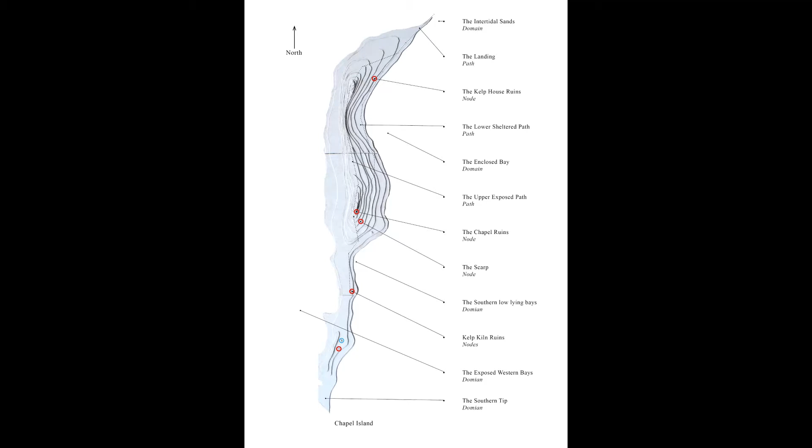I found in my early research there was ruins of a small chapel on a nearby island with a suspected link to the mainland abbey. I began to envision movement on the site again and reinstating a centuries-old connection.

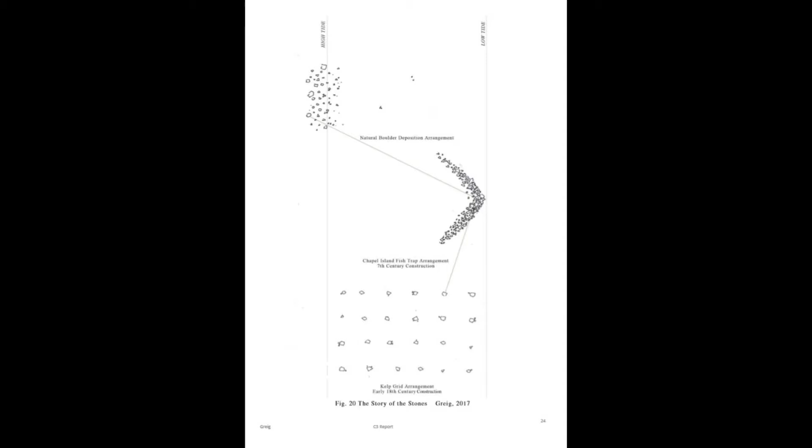The idea of movement was reinforced when I found that the stones of fish traps originally built by the monks in the 7th century were later repurposed for the infrastructure of the 18th century kelp industry on the very same foreshore. A rich historical site context was unfolding in front of me, and my research began to focus on the historic kelp industry that once had a significant commercial importance to the area.

A National Trust volunteer kindly lent me a rare historical book that documented industrious activities on the shoreline, namely the gruelling process of burning kelp in crude, circular stone kilns. The resultant soda ash was used for dyeing linen and making soap.

Early charcoal sketches attempted to capture ideas on framing views to the landscape, but also sheltering visitors from elements. I think these set the tone and the scale of the spaces at the beginning of the project that I felt were appropriate.

On my first low tide walk to the Chapel Island, about 600 metres from the mainland, the wind was relentless. I welcomed some shelter from the topography once on the island. I knew there was something interesting in how the exposure to the elements and the natural pockets of shelter could begin to define zones throughout the site.

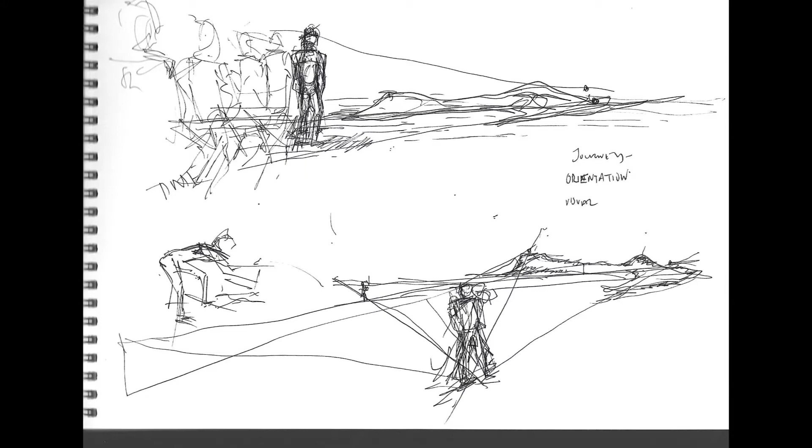All the historic infrastructure was in ruins and overgrown, but by mapping it, it provided an interesting diagram of the past movements and processes, and this helped to inform my site plan and the idea of a journey.

I put together some conceptual collages that explored the foreshore, the kelp processing heritage, and the proposed journey and engagement with the site. I felt these successfully began to unlock the site and captured some of my initial thoughts and experiences.

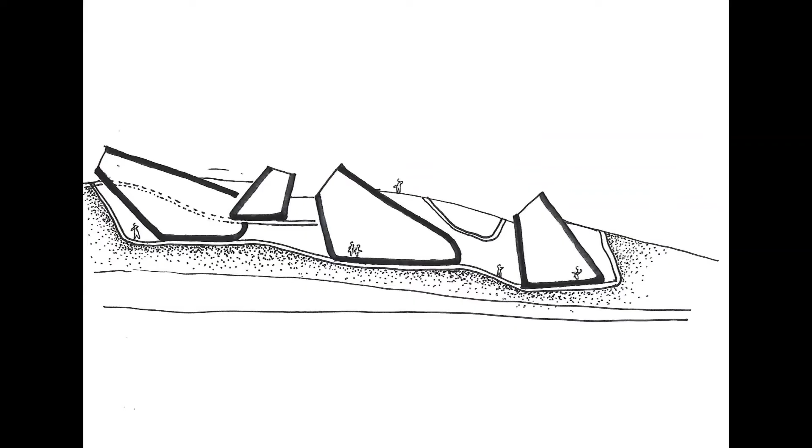Simple cardboard and clay models allowed me to experiment with initial forms and contrasting exposure and enclosure.

I was interested in developing a phenomenological approach to the concept. I tried to get as involved as possible with the site materials and the raw seaweed product. I researched emerging areas of sustainable seaweed uses, including traditional Irish baths and cosmetics.

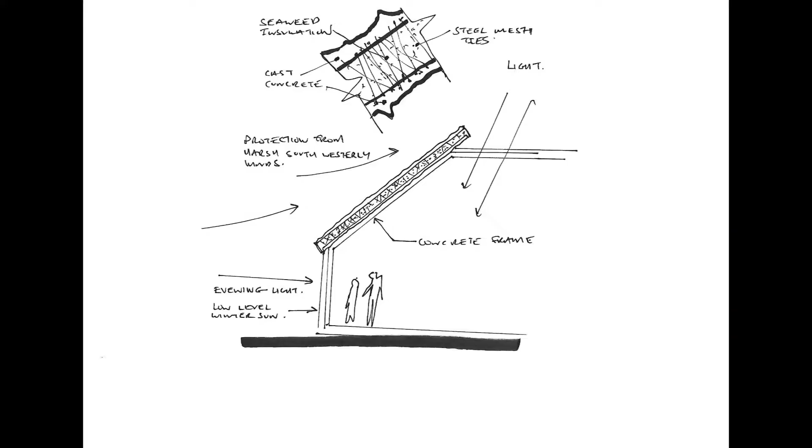My technology report explored the use of seaweed as a building material, which eventually filtered into my final design as an insulation material. I also experimented with the processes that resulted in the seaweed product that could be applied to the skin directly or infused in cosmetics.

And this was quite simple. It was collecting, washing, drying, grinding. I looked into vineyards that combined grape growth, winemaking and drinking experience for initial program precedents.

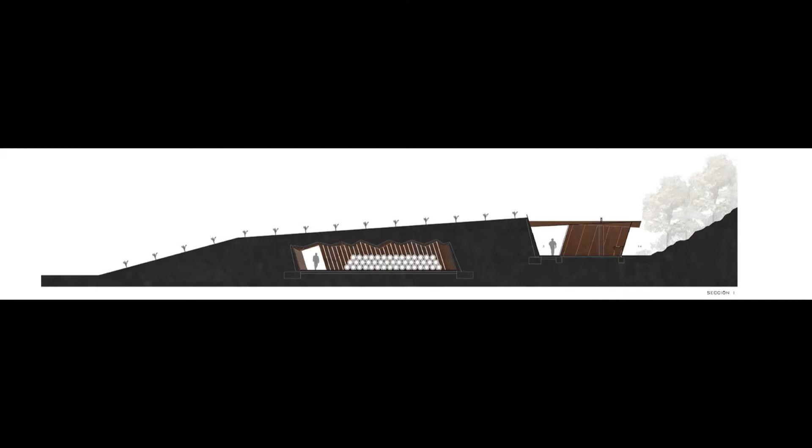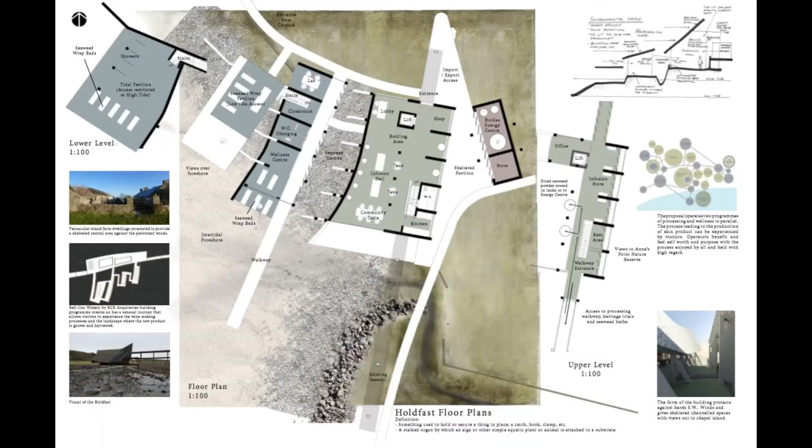These, along with discussions with my tutor, gave me the confidence not to overcomplicate the developing conceptual agenda. I could let the qualities of the site resonate. Through exploration and experimentation, two simultaneous programmes emerged that gently reinvigorated the local economy and, importantly, the cultural connection with the foreshore. The programmes were intertwined with each other, and where they met, I felt it created exciting and intriguing situations and opportunities.

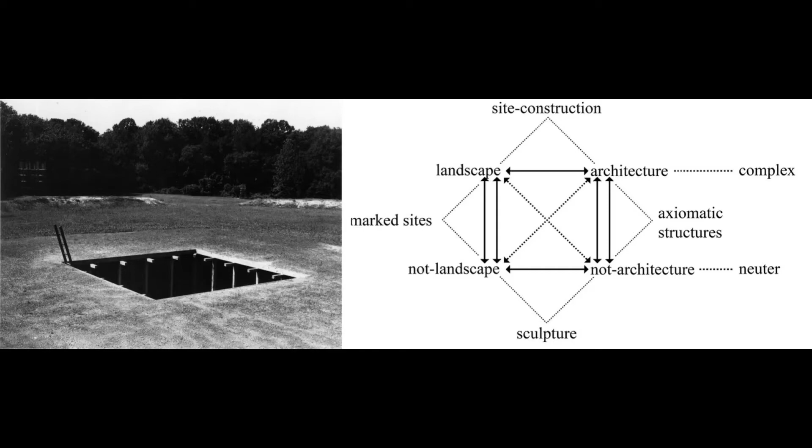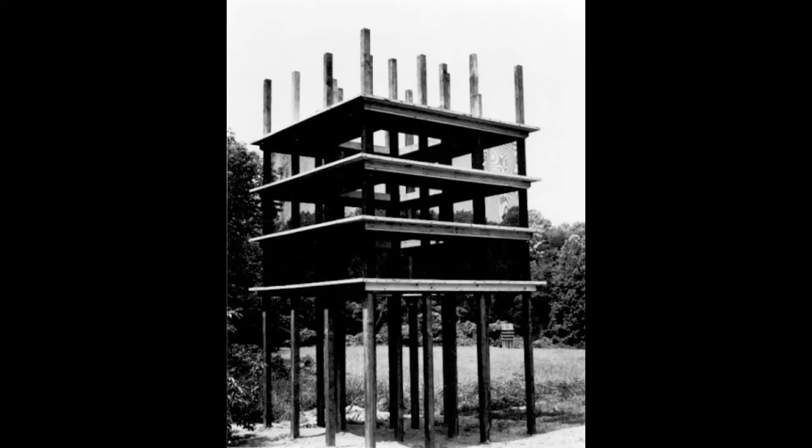Perimeters, pavilions, decoys, a sculptural piece by Mary Miss encouraged exploration. Discussing this precedent with my tutor, I investigated how each sculptural aspect had its own identity and spatial characteristics, yet encouraged a holistic site dialogue.

Allmannajuvet Zinc Mine Museum by Peter Zumthor creates an experiential journey across a heritage site. With atmosphere created through materiality, it evokes a connection with the past.

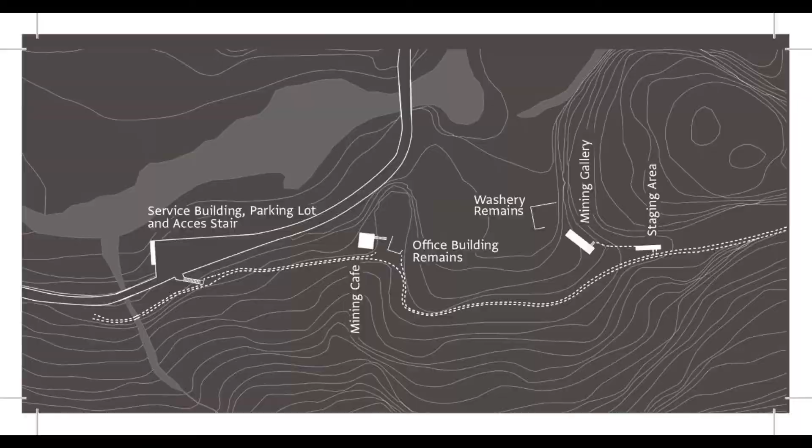One of the greatest challenges was to propose an architecture that I felt would be in harmony with the site. Exploring the qualities of the existing materials and the processes of erosion on the landscape was key to developing a treatment that I thought was appropriate.

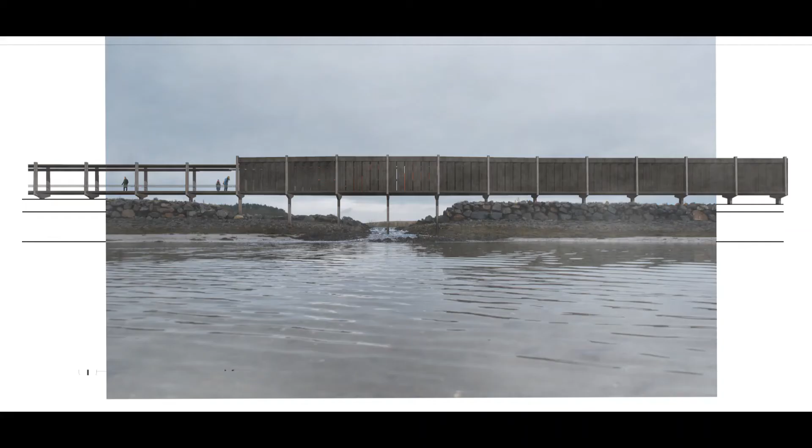Architectural form emerged from the interpretation of kelp kiln structures and the wind-defined landscape. I utilised existing site features such as an obsolete section of seawall to provide access as far out into the tidal foreshore as possible.

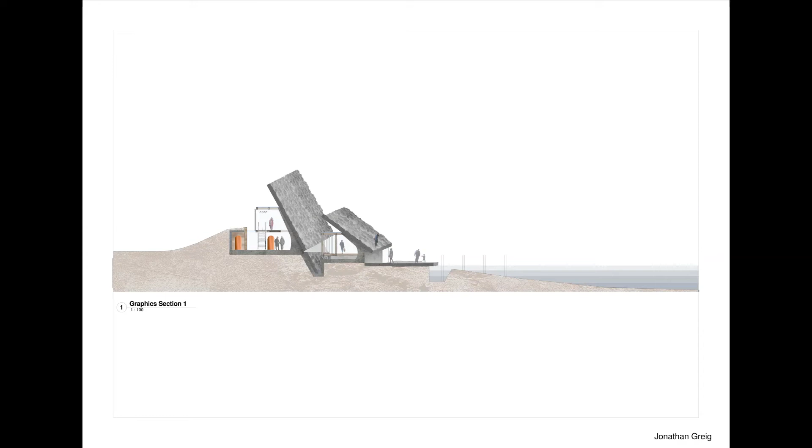The idea of casting the proposed island baths and the mainland structure's roof using the site materials as moulds appeared to capture a moment in time in the ever-shifting and changing shoreline. The building manifesting from the site and becoming part of the increasingly threatened coastline raised an important awareness point.

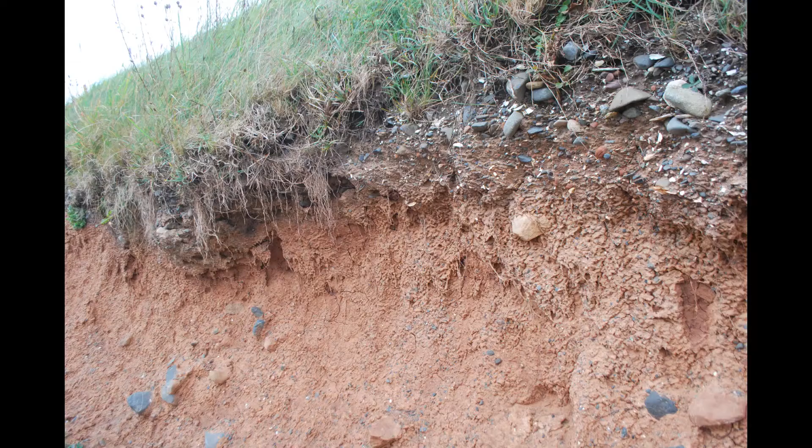Ensemble Studio's precedents seemed to resonate with the project's aspirations. I began to think of the idea of using coastal erosion to reveal the cast over a period of time.

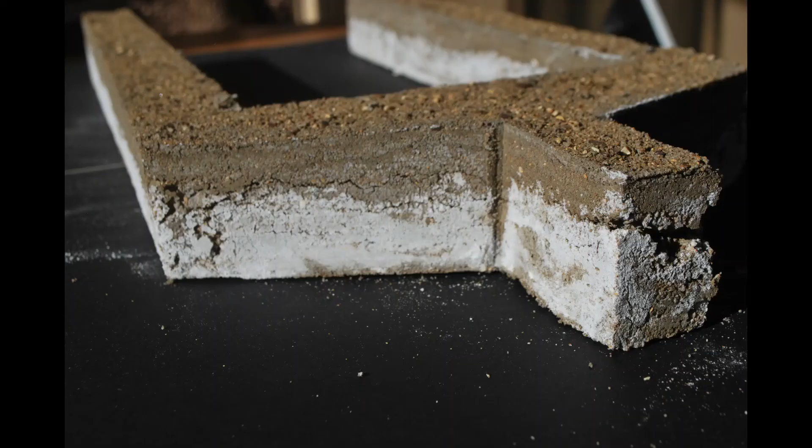As the design evolved, I tried to bring a sense of materiality and process into my model making, building the stone moulds to cast the circular concrete baths and simulating erosion at its base that eventually left the bath freestanding, or building the formwork to cast the concrete frames which would form the basis of the boardwalk structure.

These model casts were photoshopped and began to create a certain depth and atmosphere to the project vision. I explored how the process of casting could involve people and possibly some kind of celebration on the foreshore.

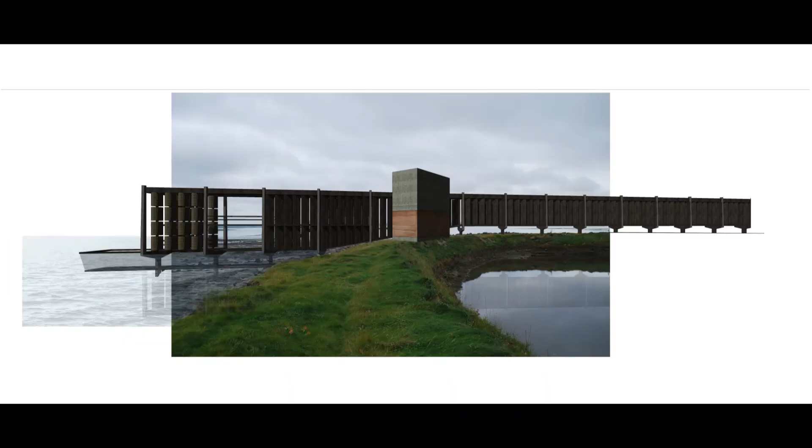Once I had established the site plan, I began to explore the moments throughout the site, again using models superimposed into the landscape. I superimposed Catherine into other images to bring a sense of scale and understanding of the human experience. I also explored the changing tide in certain areas of the site.

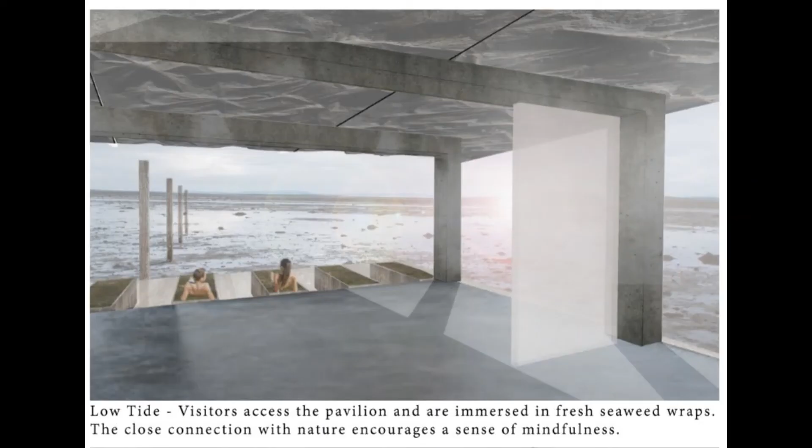Some baths would be flooded and then revealed again at low tide. This seemed to heighten the physical relationship between the visitors, the tides and the landscape.